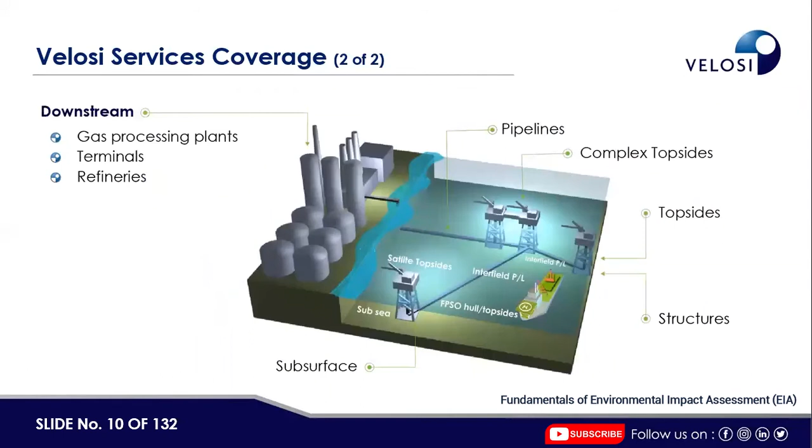So to go into a little more detail about the services we provide, in asset integrity management services, we conduct risk-based inspection, pipeline integrity management system, structural integrity management system, SIL, wellhead integrity management system, RCM, and RAM. We have conducted webinars on almost all of these service lines here in asset integrity management.

Then moving on to HSE and environmental services, we provide the complete scope of HSEI studies, risk assessment and management, HSE critical equipment and systems, environmental services, occupational health services, and emergency management and planning.

Then in engineering services, we carry out conceptual design feed, detailed design and engineering consulting services, operating manuals and procedures, design verification and appraisal, fitness for service, and as-built drafting services. We have conducted a webinar on fitness for service previously.

Then moving on to software solutions, we have our own in-house team of software development engineers.

Over the years, we have developed various software being used by clients all over the world. VAIL-Plant is our asset integrity management software, which I mentioned earlier. VAIL-PHA, process hazard analysis software, which is used for HAZOP and SIL studies. VAIL-PSRA, petrol station risk assessment software.

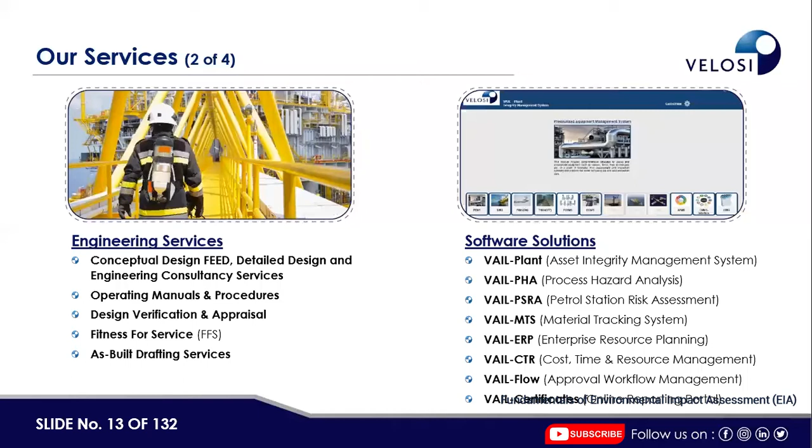Then we also do audits and assessments, such as OSHA safety audits, technical audits, environmental audits, structural audits, regulatory compliance audits, and so on. And we also do ISO certification and trainings for almost all the leading standards, such as 9001, 14001, 45001, and so on.

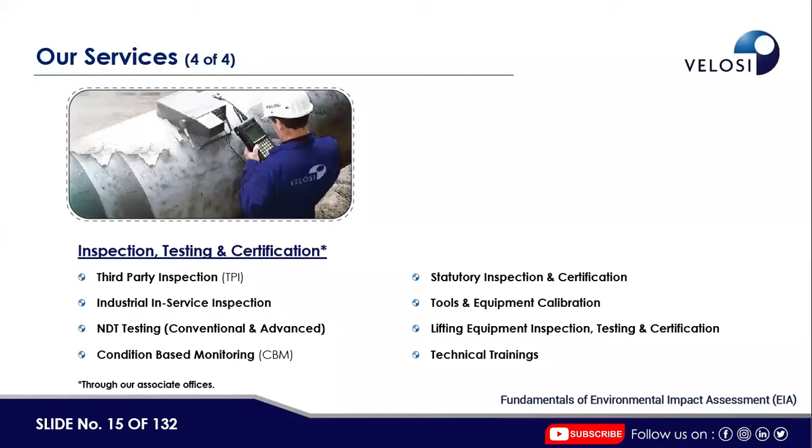Moving on to inspection, testing, and certification, we also provide third-party inspection services, industrial in-service inspection, NDT testing, both conventional and advanced, using our own in-house equipment, condition-based monitoring, statutory inspection and certification, tools and equipment calibration, lifting equipment inspection, testing and certification, along with technical trainings.

So to provide these inspection services, here are some of our in-house equipment. For MFL, we have the Floormap. For coating thickness measurements, we have the Elcometer Minitest. For corrosion under insulation, we have the Ediflex. For LRUT, we have the Teletest Focus Plus. For ultrasonic thickness measurements, we have the Olympus 38DL. For positive material identification, we have the Olympus XRF analyzer. For tank weld inspection, we have the Eddify V750 vacuum box.

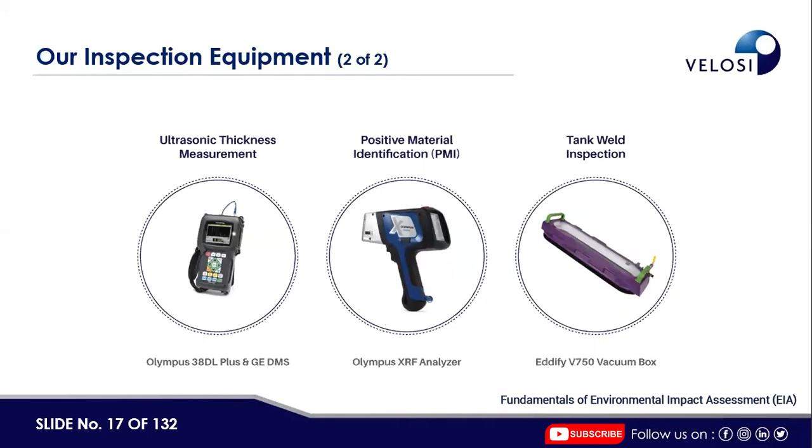Velosi has successfully executed over 600 plus projects with over 300 plus clients, including ADNOC, Dragon Oil, Saudi Aramco, Lukoil, and many, many more big names in the region.

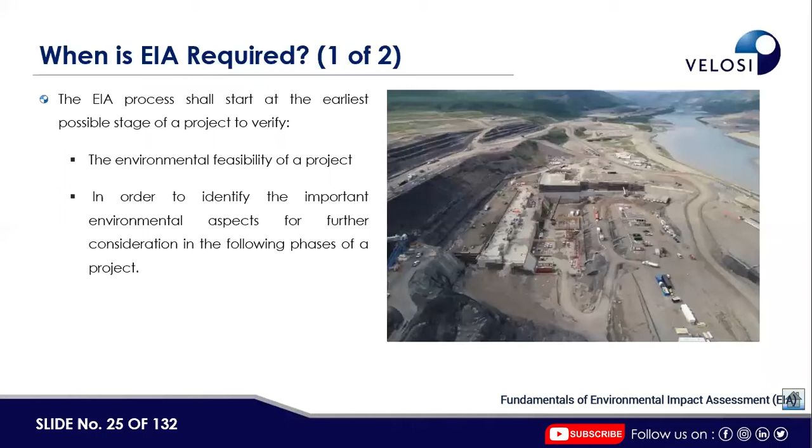But in some circumstances, we have to follow the legal authorities available in the region. The relevant authority may require only environmental impact assessment at the early stage of the project. Some authorities, depending upon the nature of the project and the facility, can also ask for environmental impact assessment during the operation phase as well.

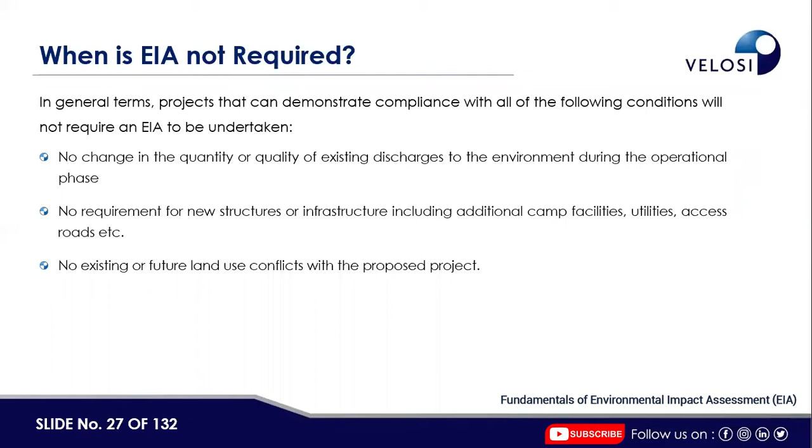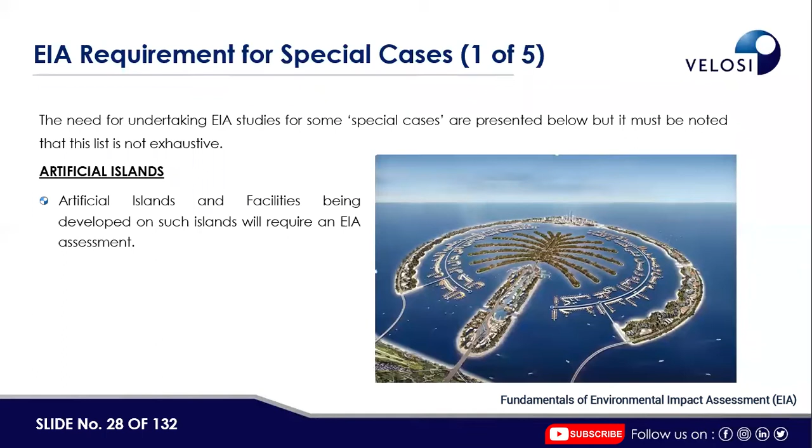But there are some cases, some circumstances, when the environmental impact assessment is also required. For example, an artificial island. If there is a need for development of an artificial island, we need to develop a detailed environmental impact assessment.

Then there is another case where environmental impact assessment is required, that is existing facilities. EIA will be reviewed as part of the HSE integrity assurance audit, including the environmental monitoring requirement for performance of emission control equipment and effluent standards.

Sometimes it is the requirement of the facility, or the client, to conduct a 5 year HSE integrity assurance audit, or as per the client requirement they can set the frequency. In that perspective, we also need to conduct the environmental impact assessment, for existing facilities, whether the controls are in place or not, or whether the discharges into the environment are in a controlled manner or not. At that point, we also need to conduct environmental impact assessment.

And then there is brownfield and modification projects. If an existing facility wants to expand operations or modify the project, then at that stage we also need to conduct the environmental impact assessment. If there is an already existing facility and they want any modification that has a significant environmental impact, then we need to conduct the environmental impact assessment in detail.

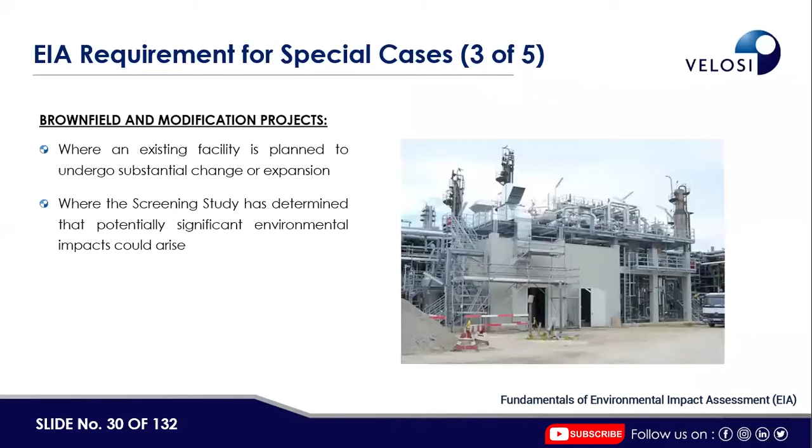There is also a combined EIA for some project facilities and activities. For example, in seismic surveys, we need to make a combined environmental impact assessment. In this kind of project, there is no FEED, no detail engineering, no construction, and no operation.

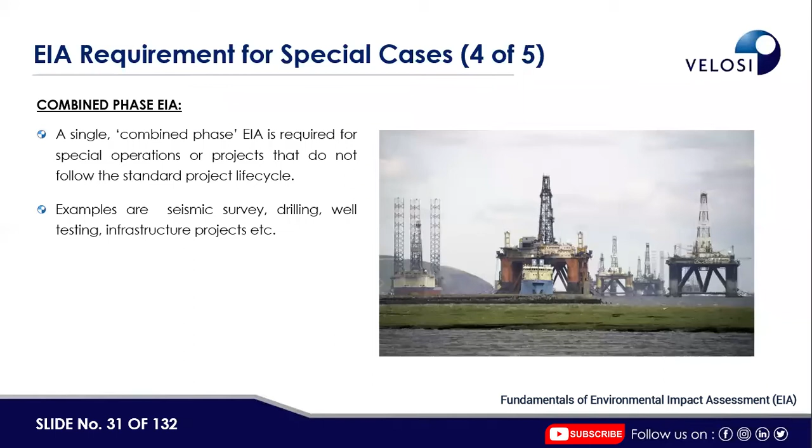In the same way, drilling and well testing are also the same kind of projects where there is no FEED, no detail engineering, no construction, and no operation as such separately. So that's why we need to conduct environmental impact assessment for these kinds of projects as well.

Then if a facility or project is going to undergo decommissioning or demolition, we have to assess the environmental impact as well - what is going to be discharged and what is going to be impacted. We have to conduct a detailed environmental impact assessment for decommissioning and demolition too.

So far we have discussed and explained what environmental impact assessment is, when we have to conduct it, and at what stage we don't need it.

Now we are going to describe the environmental impact assessment objectives - basically what the objectives are and why we need to carry out the environmental impact assessment.

First, the objective of the environmental impact assessment is to provide a detailed description of the environmental baseline condition. What is environmental baseline condition? We will explain in the upcoming slide.

Another objective of environmental impact assessment is to identify the impacts of the proposed project - what impacts will be created by the proposed project. We have to identify this, as environmental impact assessment is one of the procedures we explained in the first slide.

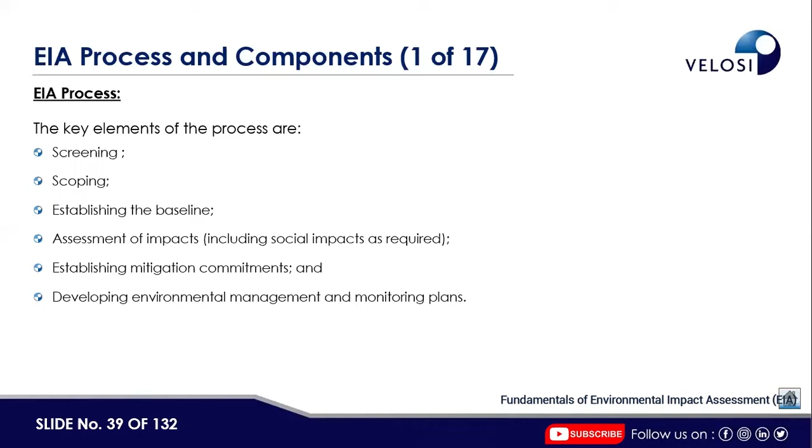In the environmental impact assessment, we do project definition or hazard identification, and we make the baseline data as well as the environmental profile. On the basis of all these things, we predict the environmental impacts that can be generated due to the project activity or project phase.

Then on the basis of identification of the environmental impact, we evaluate the impacts to determine whether they are significant or not. Based on the nature and significance of the environmental impact, we propose mitigation measures so that the impact is not significant, because if the environmental impact is significant, the project cannot move forward. Therefore we propose mitigation measures so that the residual impact can be less.

So this flow chart describes the process: starting from screening, then the scoping study, then the EIA. On the basis of the baseline profile, we predict environmental impacts, and based on those impacts we evaluate them. Then, based on identification and evaluation, we propose mitigation measures.

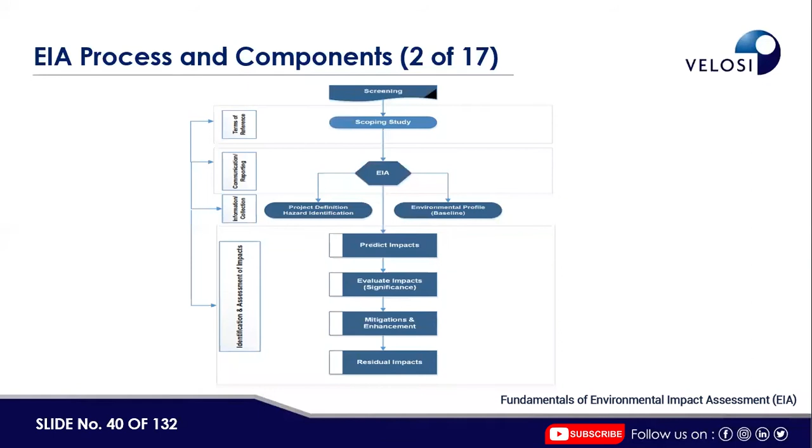Ms. Gayatri, my colleague, already explained what screening and scoping are, and now we are going to describe them further. What is screening and what is scoping? Now we are going to describe this in detail.

As my colleague mentioned, screening is a process of deciding whether or not a project is likely to have significant environmental impact, and therefore whether or not an EIA is required. So screening decides either we require an environmental impact assessment or not, or it decides whether the project has a significant environmental impact on the environment or not. Screening is the first step to decide either the project has a significant environmental impact or not, yes or no, and if it does, then we determine whether we need an environmental impact assessment or not.

A screening study involves conducting a preliminary review of the project, identifying the sensitivities of the site and surrounding land uses, considering the environmental release to air, water, and land, and making a judgment on whether or not any significant impacts are likely to arise. It's the same case as we described, we have to check whether the project activities or the project itself is releasing any air emissions or other discharges to the environment with significant impact, and then we have to conduct the environmental impact assessment in detail.

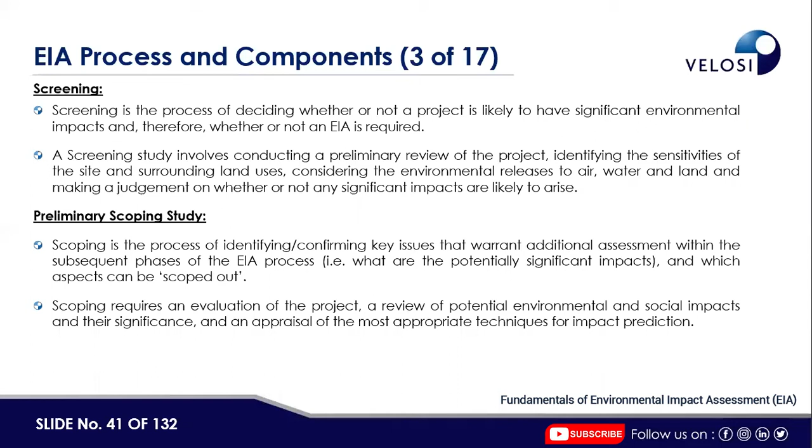If the project is in an industrial area, then there are some components that can be scoped out as well. So the preliminary scoping study basically defines the scope of the environmental impact assessment, and in some countries it is also called the terms of reference.

Then there is the final scoping report as well. There are different techniques available that can be used in different regions to finalize the scoping report.

The first is a checklist. There are different kinds of checklists in the regulation, on the client side, or even an experienced environmental scientist, engineer, or environmental person can make their own checklist of what to include in the scoping.

Then there are risk matrices as well, to evaluate the impacts. As mentioned before, if the project has an environmental impact and it is significant, then we have to conduct the environmental impact assessment or the particular baseline survey. So the risk matrix helps us identify which environmental impacts are significant and which are not. Then there's professional judgment and brainstorming.

If a person has enough experience, enough knowledge, and has conducted enough environmental impact assessments, they can also judge what environmental impacts are significant and what are not significant. There is also a brainstorming meeting, a workshop, or a team discussion where the team discusses which environmental impacts are significant, which are not, and which require a detailed survey. So professional judgment and brainstorming is also one of the tools to finalize the scoping report.

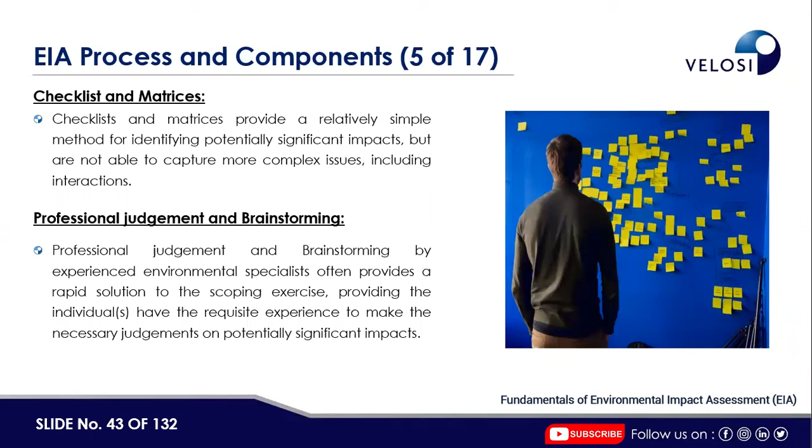And the next point is the ENVID workshop, or ENVID. ENVID is basically an exercise or workshop, a brainstorm meeting and discussion among professionals of different disciplines. It can involve environmental engineers, process engineers, design engineers, HSE engineers. It is a discussion, a workshop in which all discipline engineers sit together, review the project description, and identify which environmental impacts are potentially significant and which are not.

It is a workshop that must be chaired by an experienced environmental scientist or environmental consultant or professional. They should have enough knowledge about the process, what the process is, and what impact the process can have on the environment. There are different methodologies for conducting the workshop, and there are different guide words that can be used to identify impacts in the ENVID workshop.

For example, there is an environmental aspect group called air emissions, which includes different kinds such as stack emission, vent emission, and fugitive emissions. In the same way, there is an environmental aspect group for liquid discharges, one for waste disposal, and a guide word or aspect group for resource consumption.

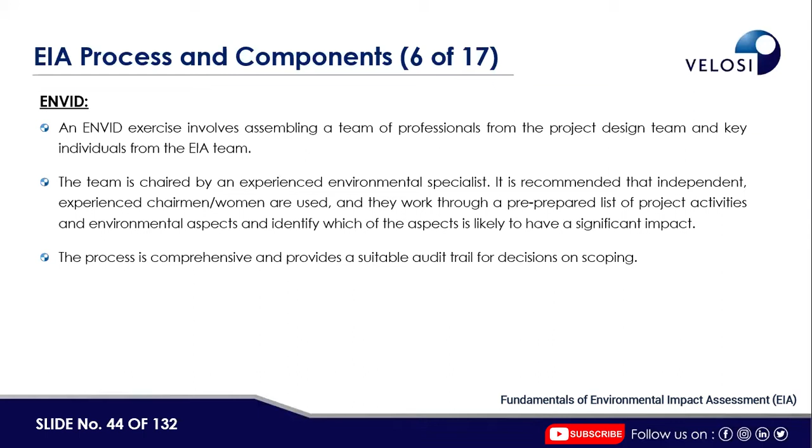With the help of these guide words, we can identify which environmental impacts are significant and which are not as significant.

You can see in the air emission, we identify different activities. For example, vehicular movement - there are two aspects which can be raised due to vehicular movement: one is the engine exhaust emissions, and the second one is dust emission.

In dust emission, there are different kinds of particles: for example particulate matter 10 (PM10), TSP (total suspended particulate), particulate matter 5, and particulate matter 2.5. So basically there are different particulate matters which can be generated due to vehicular movement, and there is emission from the vehicle engines as well.

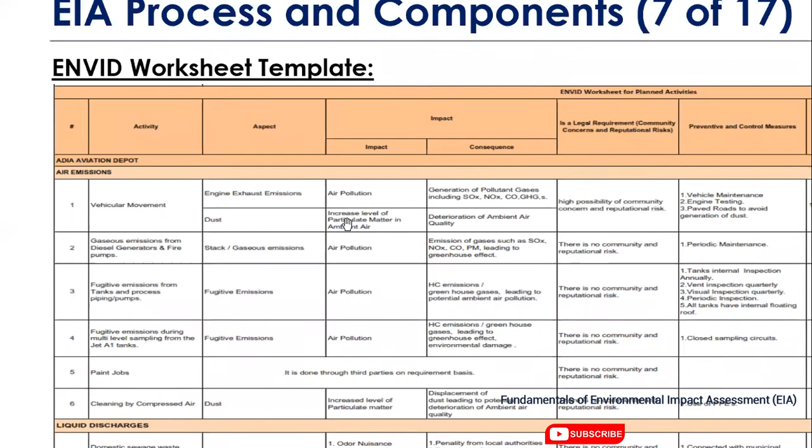The impact can be air pollution, an increased level of particulate matter in the ambient air.

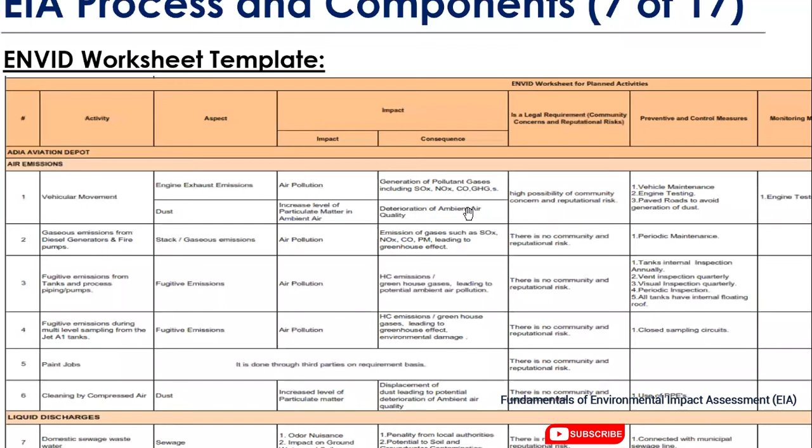The consequences can be generation of pollutant gases, including oxides of sulfur, oxides of nitrogen, carbon monoxide, and GHG, greenhouse gases. Then we have to identify either there is a community concern or a reputational risk.

If the project is very near to the community, then there might be a chance that this project is a community concern. The community can raise the concern, because if vehicular movement is more, then there is more pollution. So they can raise the question, they can raise it against the project, and it can become a community concern.

And if the values of emission from the vehicle exceed the limit, then it might be a reputational risk as well, because every company has its own reputation. They have their own policy that they must comply with environmental laws, and if the values exceed the prescribed standard limit, then there might be a reputational risk as well.

So we have to identify both perspectives - either there might be a community concern, or only a reputational risk, or there are chances that there might be both a community concern and a reputational risk as well.

Then we have to identify the preventive and control measures that are already in place. For example, for the same activity we discussed, vehicular movement, there is a control measure - vehicle maintenance. If the vehicle is maintained properly, there is very less chance that they emit more pollutants.

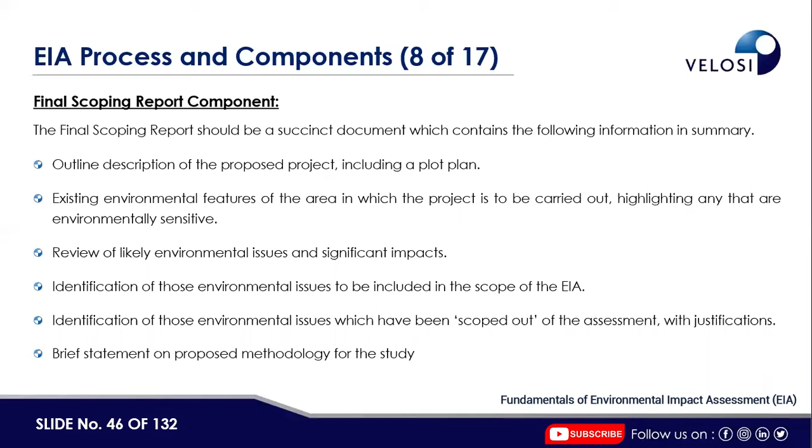Now there was a question before that we already addressed, regarding the environmental baseline. What is the environmental baseline? As explained before, there are different features and components that we need to monitor, and that condition and survey is called the environmental baseline.

For example, ambient air quality, soil sampling and analysis, noise monitoring, groundwater sampling and analysis, and depending on the nature of the project, marine survey, terrestrial survey, and socio-economic survey as well. So the EIA should include a detailed evaluation of the baseline condition of the project and its surroundings.

There are different criteria at which stage or level we have to conduct the environmental baseline survey. In some guidelines and regulations, we have to cover a 2 kilometer square area. In some guidelines, 5. It depends, but we have to cover at least a minimum of 2 to 5 kilometer square area for the environmental baseline conditions.

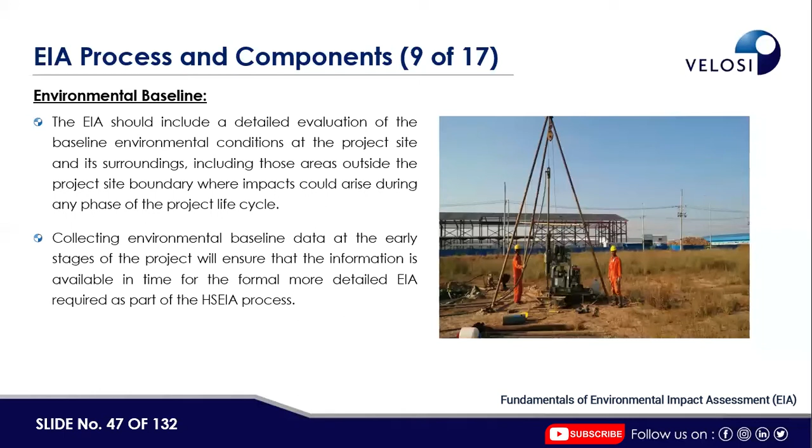Then the impact assessment and significance. As mentioned before, there are different criteria and methodologies we can use for impact assessment and to identify the significance of environmental impact. Four types of environmental risks need to be considered: one is impact associated with activities such as civil engineering; then routine impact associated with planned normal operations; then non-routine impacts such as those arising from process trips, emergency scenarios, accidents; and historical impact due to past activities.

Now we will explain and describe planned environmental impacts. Planned environmental impacts are those associated with normal, routine operations and normal project activities. For example, a building project is a normal routine planned environmental impact. An operating facility, for example emissions to atmosphere through combustion or venting, is a normal routine operation. If the project facility has a generator on site to provide electricity, operating it will definitely emit emissions to the air. It is a normal and planned environmental impact because it is a planned activity.

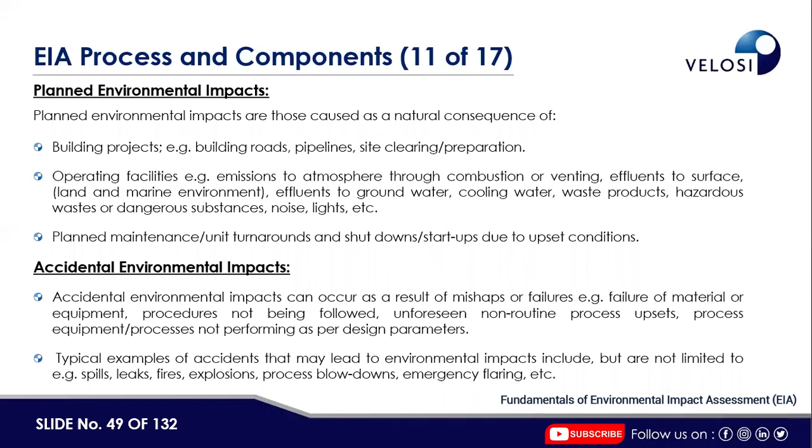Then what is the significant environmental impact? The significance of the planned and accidental environmental impact depends on a number of factors: impact magnitude, severity, impact duration, reversibility, impact interaction, whether the impact is positive or negative, and the sensitivity of the receiving environment.

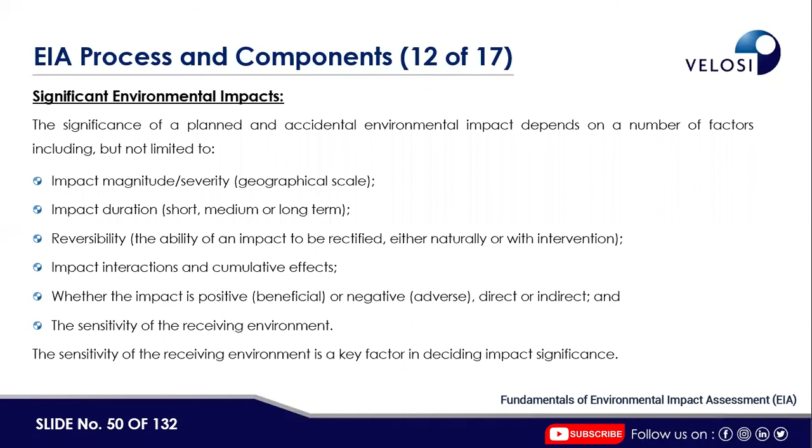As mentioned, in the template I showed you during the ENVID, we have to identify the significance of the environmental impact. There are different rankings which can be used for ranking the significance of the environmental impact assessment. I will show you one of the matrices.

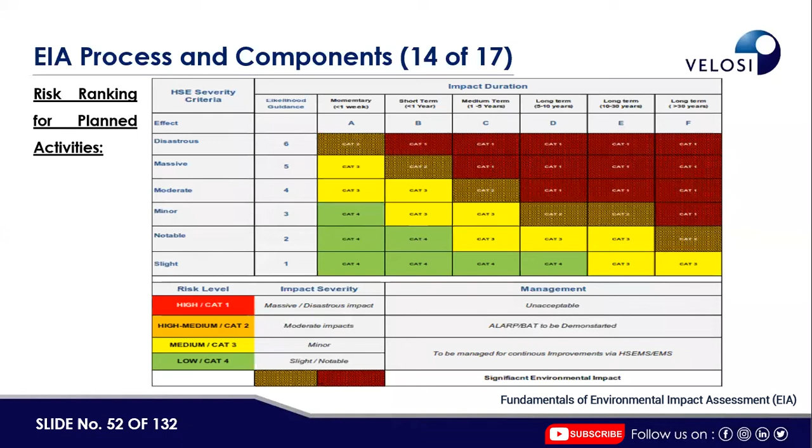Now I'm going to explain what is the major accidental environmental impact. Accidental environmental impacts are those caused by accidental releases that have the potential to lead to disastrous, catastrophic, major, or serious consequences. Previously we only defined accidental environmental impact, but here we are defining what is a major accidental environmental impact, which basically leads to disastrous, catastrophic, major, or serious consequences to the environment.

With respect to the accidental environmental impact, we have to use another matrix, called the environmental risk potential matrix. This is a separate matrix which we normally use for accidental impacts.

Here we have to define or differentiate between the planned and the unplanned. Planned impacts are those which arise due to normal or routine operations, and unplanned are those which arise due to unforeseen circumstances - accidental, like spillages, loss of containment, leakages. All are part of the accidental environmental impact assessment.

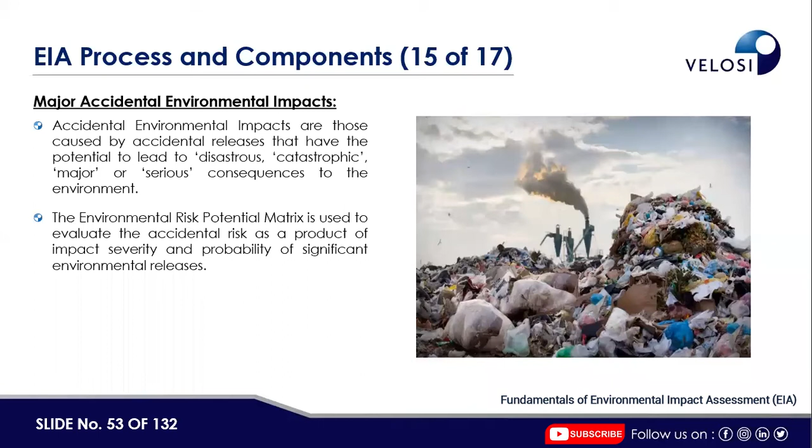In the previous slide I explained the matrix used for the planned environmental impact assessment, and for the accidental environmental impact we have to use the risk matrix, which I'm going to share now. This is the matrix that we normally use for the unplanned environmental impact.

Now I'm going to explain basically the components or the normal report structure of the environmental impact assessment.

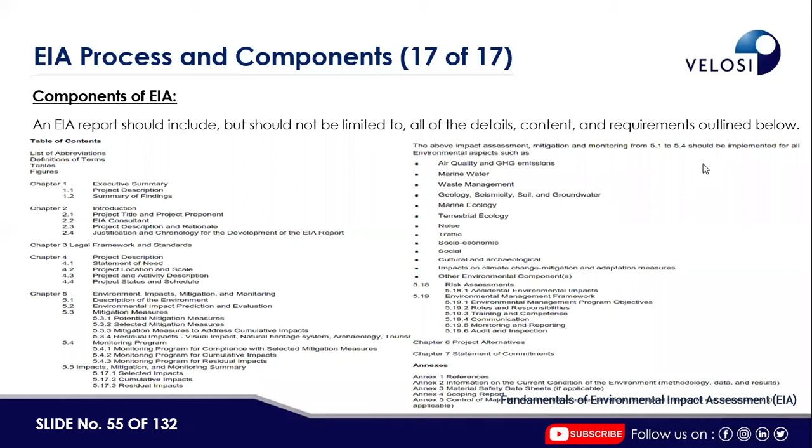This is the normal environmental impact structure, starting from chapter 1, which is an executive summary. In the executive summary we have to briefly explain the project description, then give a summary of the findings. The next chapter, the introduction, is again a brief summary of the project.

Then we have to mention the project title and the project proponent, who is proposing the project, and mention the details. Then, who is conducting the environmental impact assessment - we have to put the environmental impact assessment consultant details.

Then the project description, the rationale, the justification, and the chronology for the development of the environmental impact assessment. Then the next section is the legal framework - what are the legal requirements, the legal standards that apply to that particular project?

There are some standards and legal frameworks which are not applicable to that particular project, then we don't need to mention them. But all the standards and frameworks that apply to that particular project, we need to mention in section 3.

Then chapter 4, section 4, again will be the detailed description of the project: statement of the need, project location, project activities, status, schedule, everything. Then section 5, that is the detailed section - environment, impact, mitigation, and monitoring measures.

In this section we have to identify and conduct the baseline survey which falls under the environmental section. Then we have to identify and evaluate the impacts, mitigate the environmental impacts, and propose some monitoring measures as well.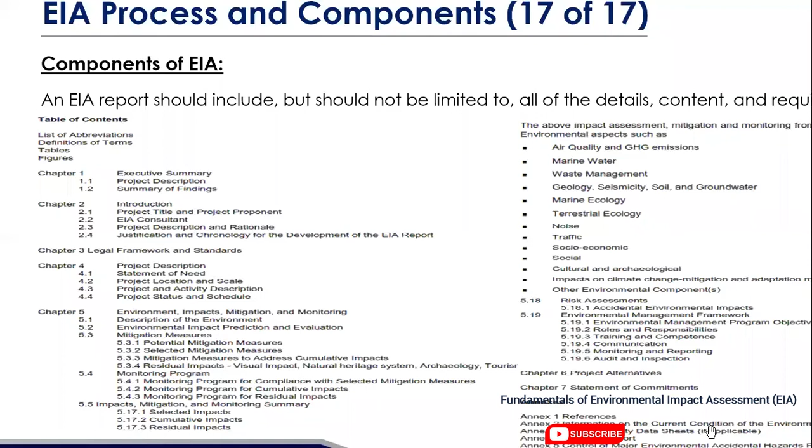And then we have to assess the risk assessment as well. We have to carry out the risk assessment, which I mentioned before, for all those unplanned environmental impacts which arise due to unplanned activities - we have to carry out the risk assessment as well.

Then we have to propose a management framework, which includes the environmental management program, objectives, roles. We have to define some roles and responsibilities.

We have to propose some training and competency requirements. We have to mention some communication protocols, monitoring and reporting tools and requirements, and then audit and inspection tools and requirements.

And the last section is the project alternatives. We have to have some discussion on the project alternatives as well - for example, if we change the locations, if we change the technology of the project activity, we have to identify the project alternatives as well.

And then the last section is the statement of commitment, where the project proponent has to give some commitment that they will comply with all the applicable standards and all the monitoring requirements mentioned in the environmental impact assessment.

This is the project alternative. I explained already that we have to mention some alternatives on the basis of, for example, the project location.

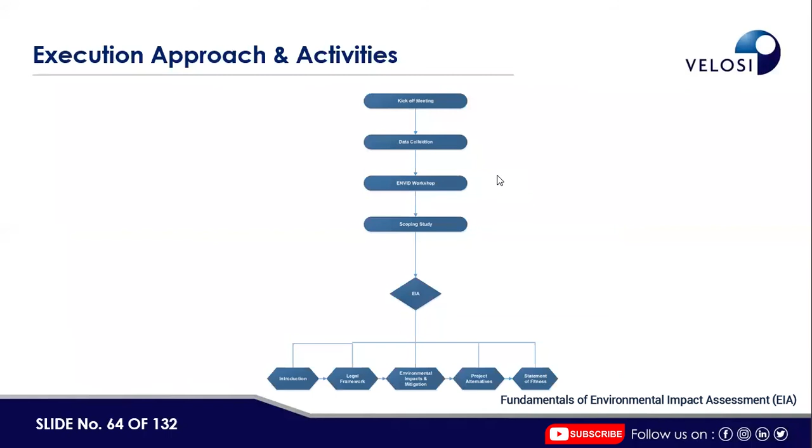What we did and carried out during the execution of this project, I will show you in the flow chart. First, we carried out the kickoff meeting, then data collection and data review. What kind of data did we collect for this EIA? We collected the process description, P&IDs, PFDs, and all the relevant company HSE documents, and reviewed all of them.

On the basis of the data collection, we conducted the ENVID workshop. We explained before what the ENVID workshop is, but I will explain it again for continuity. ENVID stands for Environmental Impact Identification workshop, and it is normally chaired by an experienced environmental scientist, environmental consultant, or environmental engineer with enough knowledge, and it must be participated in by engineers from different disciplines - process engineers, HSE engineers, design engineers, construction engineers, resident engineers - all disciplines applicable to that particular project must participate in the ENVID workshop.

As my colleague already explained, it is a qualitative assessment of the risk associated with the environment due to the project activities. On the basis of the ENVID workshop, it becomes easy to identify the most potential significant environmental impacts that we need to focus on in the environmental impact assessment.

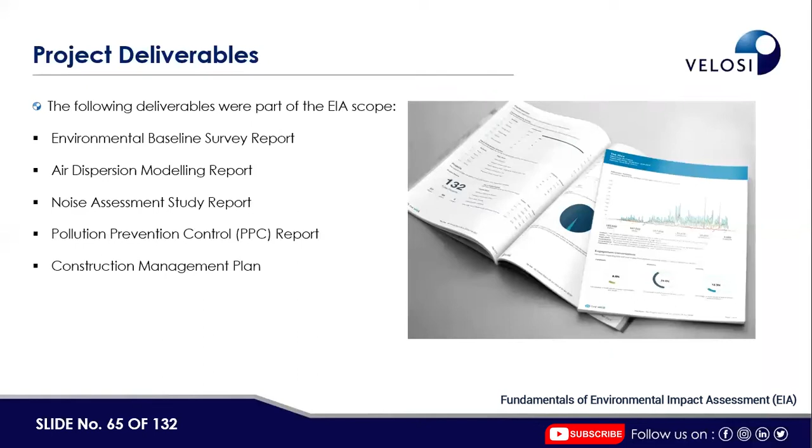Now I will explain one by one the detail of air quality: what were the environmental impacts, what were the baseline conditions, and how we evaluate the environmental impacts and propose mitigation measures.

Environmental air pollution can cause significant effects on the environment and primarily affects the respiratory system. These are some conditions and causes due to air pollution. It can damage the environment and raise health issues, because there are different criteria pollutants, for example carbon dioxide, carbon monoxide, oxides of nitrogen, oxides of sulfur, and particulate matter. These criteria pollutants not only impact the environment but can also affect health.

There was a question with respect to climate for the baseline survey. Yes, under air quality we have to consider climate as well: what is the wind direction, what is the wind speed, what is the temperature, what is the frequency of rain, and in which months we can expect more rain. What is the winter season, what is the summer season—we have to consider all of this under climate for air quality.

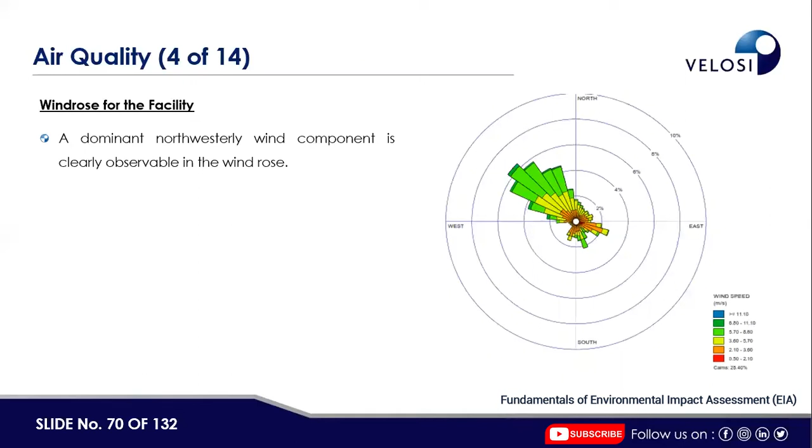This is the wind rose that we collected. A dominant northwesterly wind component is clearly observable in the wind rose. We can see the direction of the wind is northwesterly, and this is the data we used and collected for the facility.

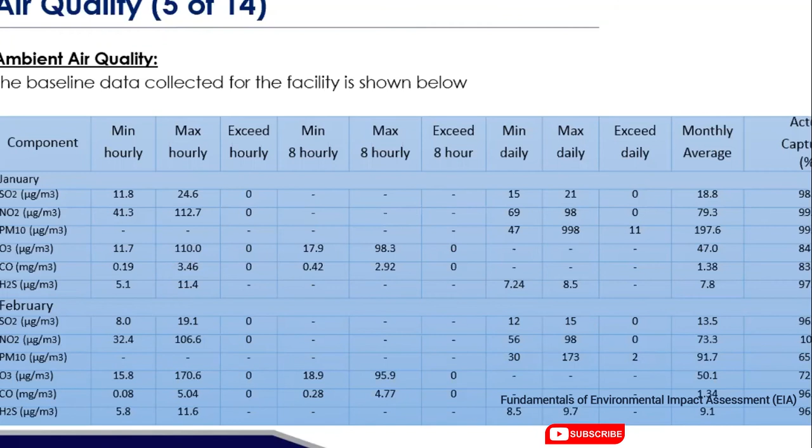You can see there is minimum hourly, maximum hourly, exceed minimum 8-hourly, maximum 8-hourly, exceed 8-hourly, minimum daily, maximum daily, exceed daily, monthly, and the actual capture, presented on a monthly basis. In January and February, what we monitored includes oxides of sulfur, oxides of nitrogen, NO2, particulate matter 10, ozone, carbon monoxide, and H2S.

These are the pollutants that we collected during the collection of the baseline for the ambient air quality. You can see there is a minimum hourly, then maximum hourly, then exceedance hourly, minimum 8 hours, maximum 8 hours.

These are the different frequencies, minimum hourly, but in the standard perspective, the prescribed limit varies from region to region. In some regions, the criteria pollutant must be monitored for 8 hours, some pollutants for 24 hours, some for 1 year as well. So it varies from region to region and country to country.

But in this study, we considered minimum hourly, maximum hourly, exceedance hourly, minimum 8 hourly, maximum 8 hourly, exceedance 8 hourly, minimum daily, maximum daily, and exceedance daily as well, but for the month of January and February.

Then we carried out air dispersion modeling for the estimation of the maximum ground level concentration of the pollutants discharged from the stacks. In this project there are different stacks, and to assess the maximum ground level concentration, we carried out the air dispersion modeling.

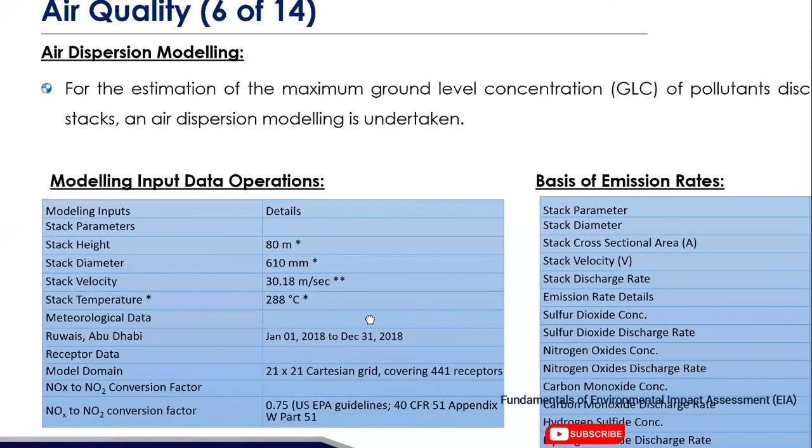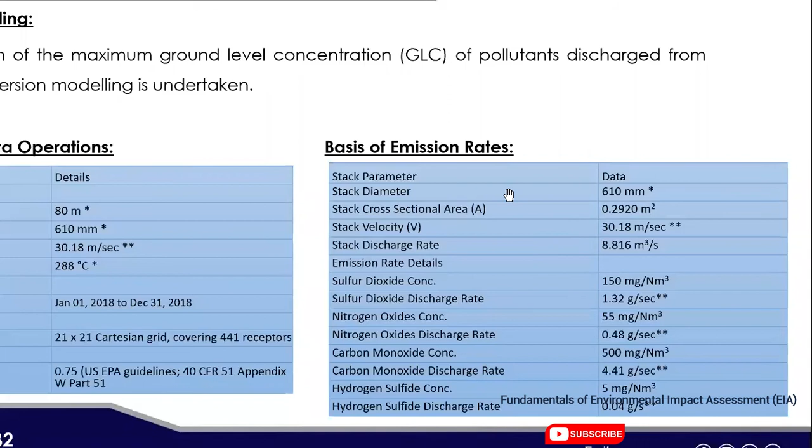For example, emission rate for sulfur dioxide, emission rate for oxides of nitrogen, emission rate for carbon monoxide, and emission rate for hydrogen sulfide as well. These are the different inputs that we used in air dispersion modeling.

We used the software Breeze AERMOD, which is US EPA's approved software, for the air dispersion modeling. The emission source incinerator was modeled with design data for comparison with the air quality standards.

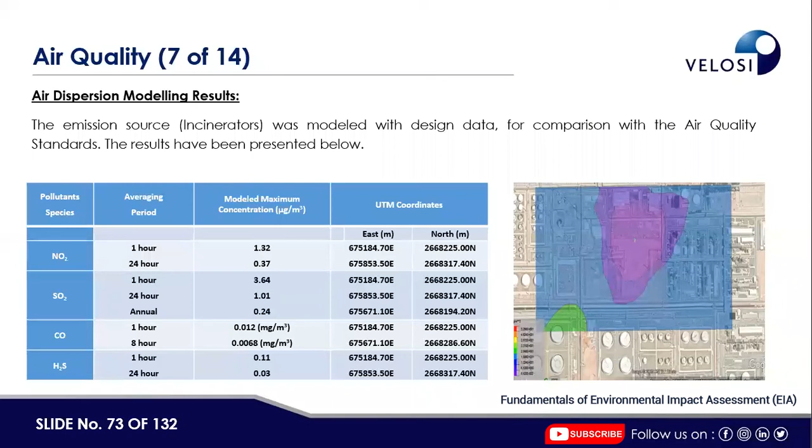These are basically the contours that we got after the air dispersion modeling. You can see the source of the emission of the pollutant, and accordingly, on the basis of the air climate, wind direction, wind speed, and stack height, these are the dispersion of the air pollutants.

Then we carried out the impact assessment. As explained before, after mentioning the current baseline conditions, we have to evaluate the impact assessment and carry out the environmental impact assessment. So we carried out the cumulative impact assessment, and the cumulative results give an indication of whether or not the long-term ambient air quality standards are likely to be exceeded.

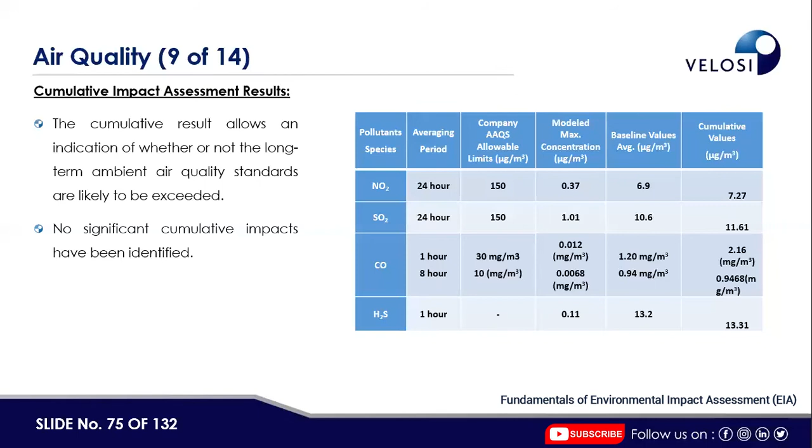No significant cumulative impact has been identified. So on the basis of the results of the ambient air quality and the air dispersion modeling, we concluded that there were no significant cumulative impacts identified.

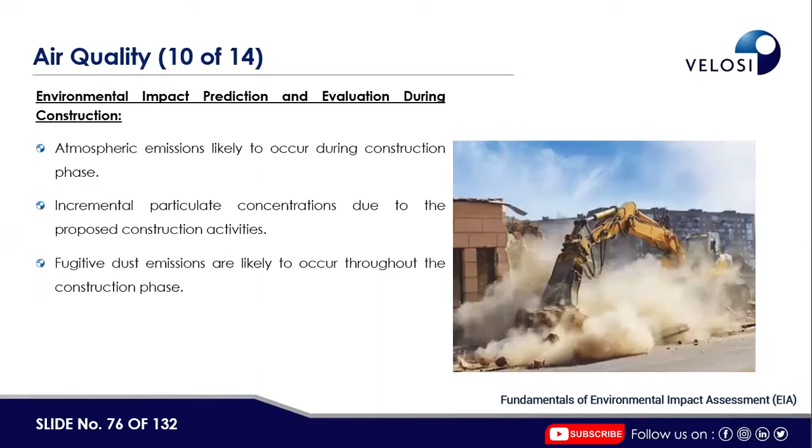Then environmental impact prediction and evaluation during construction: atmospheric emissions are likely to occur during the construction phase. Basically, in the construction phase there is vehicular movement and use of heavy equipment and machinery, so there are chances of dust emission and fugitive dust emissions during the construction phase.

Then during the operation phase, it is likely that atmospheric emissions and air quality impacts may occur during the operation phase of the proposed project. A few gases will be emitted from the heaters and boilers. There are basically three fugitive emission chances.

One is the emission from the boilers, heaters, and flares, and fugitive emissions will also be emitted from the flanges, valves, pumps, and compressors. There is also a chance that during operation of the facility, there is a possibility of H2S, SO2, NO2, and carbon monoxide from the incinerator stack.

Then if we see the cumulative impact, particulate matter and vehicular emissions may increase if any industry is established in the vicinity of the project. Therefore, the cumulative impacts are expected to be less.

On the basis of the impact assessment, we propose some potential mitigation measures. For example, unleaded petrol must be used to avoid emissions from the vehicle. If the fuel of the vehicle is of good quality, then there are very less chances of emission. We have also proposed some mitigation measures with respect to the equipment.

Vehicle emissions shall be kept to a minimum by eliminating engine idling time, then conducting regular maintenance. If the equipment and vehicle are maintained regularly and properly, there is a very less chance of emission. We propose the provision of VOC filters at the exhaust and proper PPE for VOCs will be provided to the workers. We also propose that the LDAR program should be implemented and launched, and that the handling of process chemicals should follow standard practices.

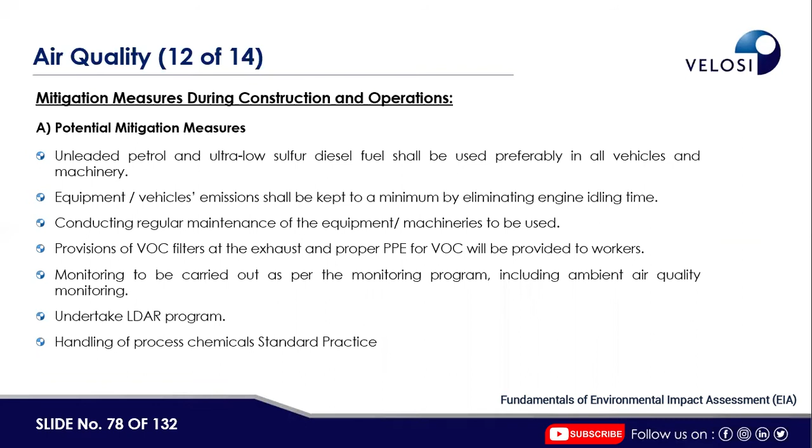There are some selected mitigation measures as well. The stack height should be higher than the roof height of the nearby structure to avoid dispersion issues of the pollutant gases. There are particular standards for this in every country, but if we follow the US EPA method, which is the most reliable, it is mandatory that the stack height be higher than the roof height of the nearby structure, so that the air pollutant can be dispersed properly.

We also propose a selected mitigation measure to ensure effective maintenance and operational procedures so as to reduce the potential for unnecessary plant operation interruptions or upsets. Emissions control can only be effective if maintained and serviced regularly. As mentioned before, if the equipment is maintained properly and the maintenance is done effectively, there is a very less chance of emissions.

Regarding speed limits, as mentioned before, if the road is unpaved and we do not monitor the speed limit, there is a high chance of road accidents and generation of particulate matter. That's why we propose a speed limit suitable for the type of road, which will help prevent accidents and subsequent traffic delays.

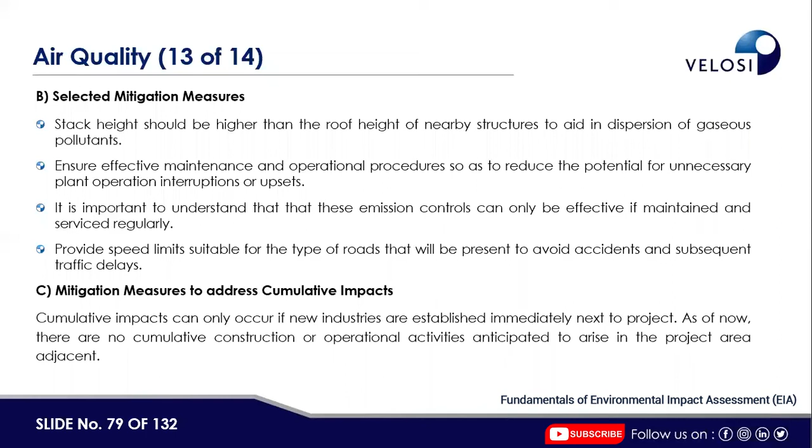We also propose some mitigation measures to address cumulative impact. Cumulative impact can only occur if there are new industries in the particular project area. In this project, there were no other industries, so we did not consider cumulative impact.

We also propose some monitoring programs. For example, a predictive emission monitoring system (PEMS) should be installed for flue gas monitoring, and a continuous emission monitoring system (CEMS) must be in place. Data tests for the CEMS and PEMS must be carried out. Routine checks of the flanges must be carried out to avoid fugitive emissions. Then an H2S detection system and periodic air quality monitoring should be implemented.

With respect to marine ecology, this project was very far from the marine ecology. That's why, on the basis of the ENVID workshop and document review, we finalized and anticipated that there is no impact on marine ecology due to this project's activities.

We've been receiving a few questions with regards to the air quality section. Somebody was asking about the main purpose of this air dispersion modeling, what software we use, why we carry it out, and what the inputs are to get the ground level concentration.

There are different kinds of software, but the software must be US EPA approved. We need to carry out air dispersion modeling to get the cumulative impact assessment, to check the dispersion of the pollutants around the surrounding environment. So the basic purpose is to check the dispersion of the pollutants, and the software must be US EPA approved.

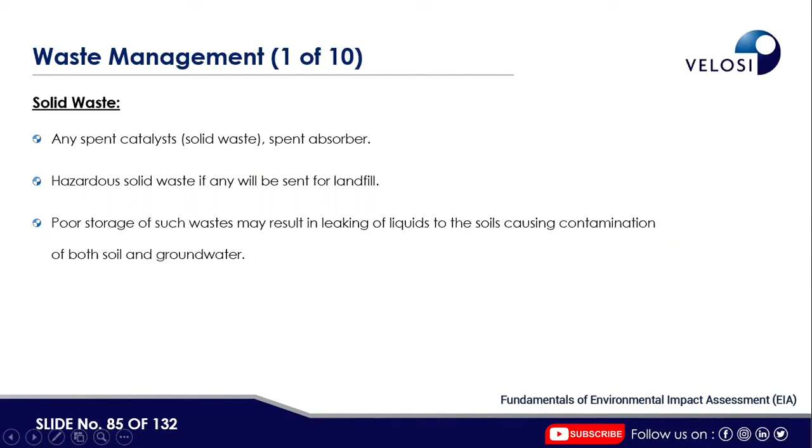Okay, try now. Hello Gayatri, can you hear us? Yes, it's clear, okay, continue. Let's continue please.

With respect to the solid and effluent summary, we collected the pollution sources: spent catalyst, for example catalyst for the Claus unit, catalyst for degassing, catalyst for tail gas hydrogenation, and then the discharge quantity, the component, destination, method of disposal by vendor, and their quantity.

For example, the catalyst for degassing has an intermittent emission mode, with a discharge quantity of 3 tons. The component is activated alumina, and the disposal method is by vendor, with a minimum 4-year service life, proper disposal, and recovery by the vendor.

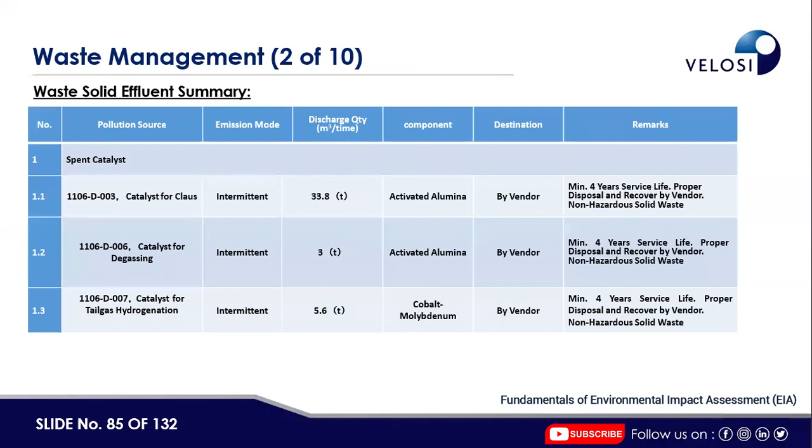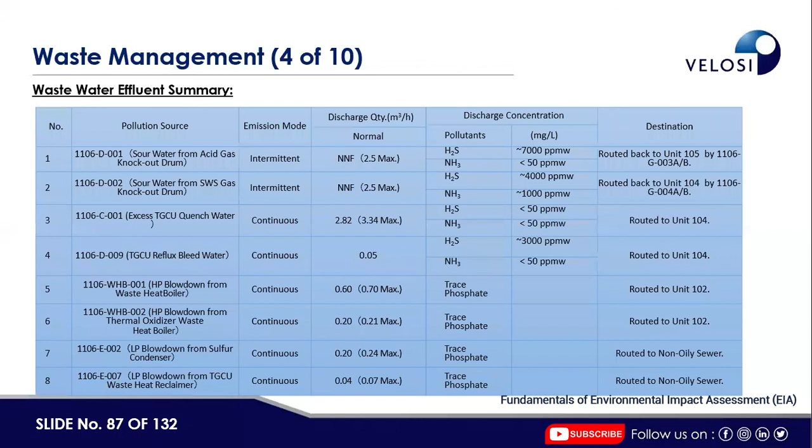Then, environmental impact prediction and evaluation during construction and operation: the liquid effluent likely to be generated includes sewage, hazardous liquid, and hydrotest water. There is sanitary sewage, and hazardous effluents which include paint and thinner from construction activities, as well as spillages.

Then the use of groundwater - water is required for construction and operation, and it can impact the groundwater level. If groundwater extraction is high, it can impact the groundwater reservoir if recharge is not done properly.

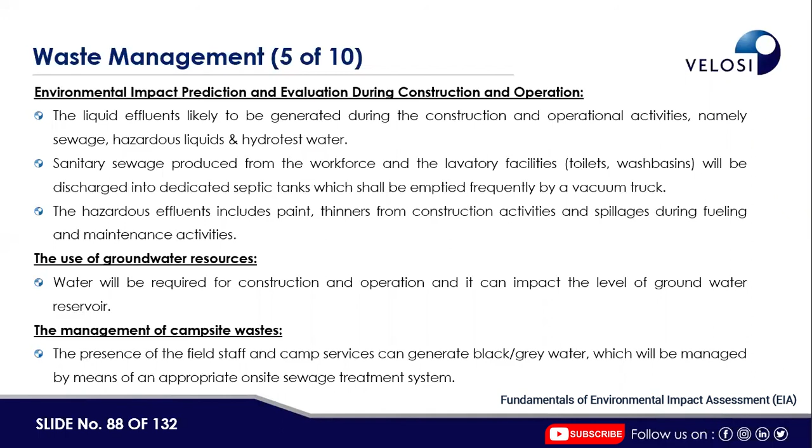Then the management of campsite waste - there must be a third-party vendor to collect the wastewater and manage the waste. And then spill and leakages, as explained before, these are accidental occurrences involving activities that use hazardous materials or the movement of a significant number of vehicles.

And then fire or explosion, if any happens, the quality of the soil may change because of the removal of nutrients on the upper layer of the soil.

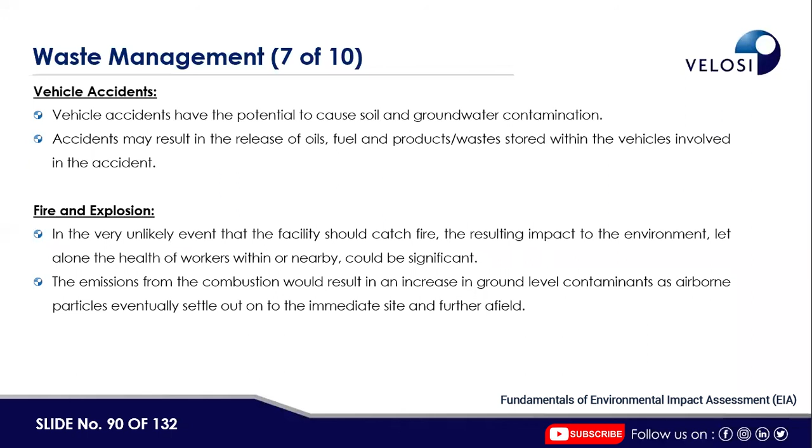A vehicle accident we already explained. Then fire and explosion, we also explained that if there is any fire and explosion, it may alter the quality of the soil because of the removal of the topsoil nutrients. Then we discussed the cumulative impacts.

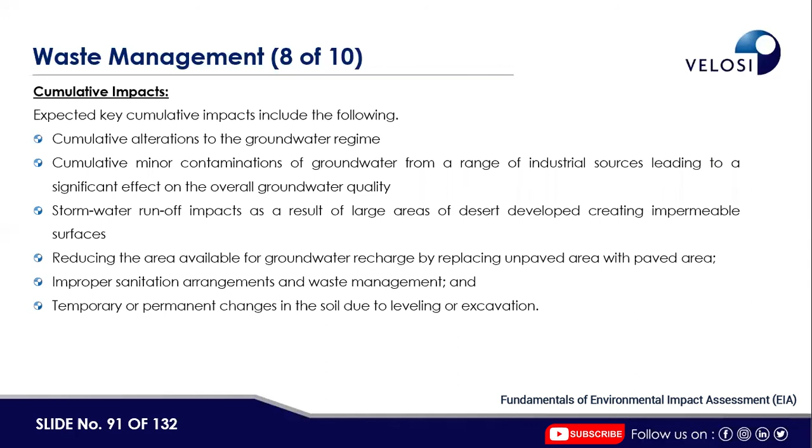Expected key cumulative impacts include the following: cumulative alteration to the groundwater, cumulative minor contaminations, stormwater runoff, reducing the area available for groundwater recharge by replacing unpaved area with paved area, improper sanitation arrangements, and temporary or permanent changes in the soil due to leveling or excavation.

Then we propose some mitigation measures: all hard standing and bunds will be inspected, suitable training will be performed, ensuring all equipment is in good mechanical condition, because if the equipment is not in proper mechanical condition, then there are chances of spills and leakages.

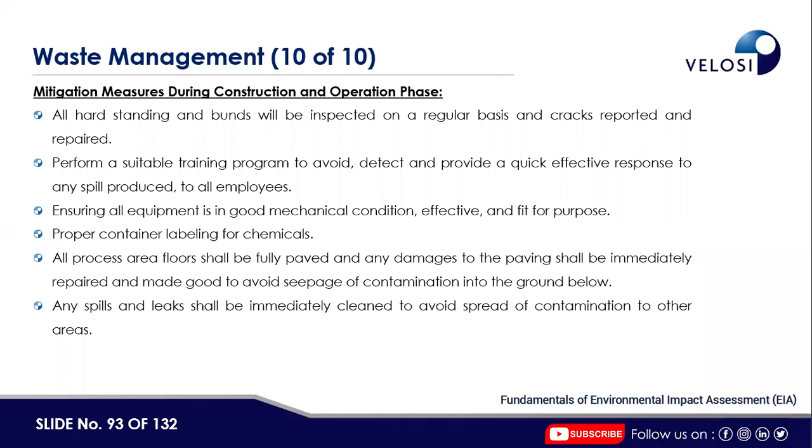Proper container labeling for chemicals can also avoid accidents. All process area floors shall be fully paved, because if not paved and there are any spillages or leakages, they can seep into the soil and degrade the soil, geology, and groundwater. Any spill or leak shall be immediately cleaned to avoid spread of contamination to other areas.

Then now we are going to start the geology section. Basically, the project that falls under this area has a very unique geology. The principal agent of transport for these deposits is the wind, because this is one of the desert areas.

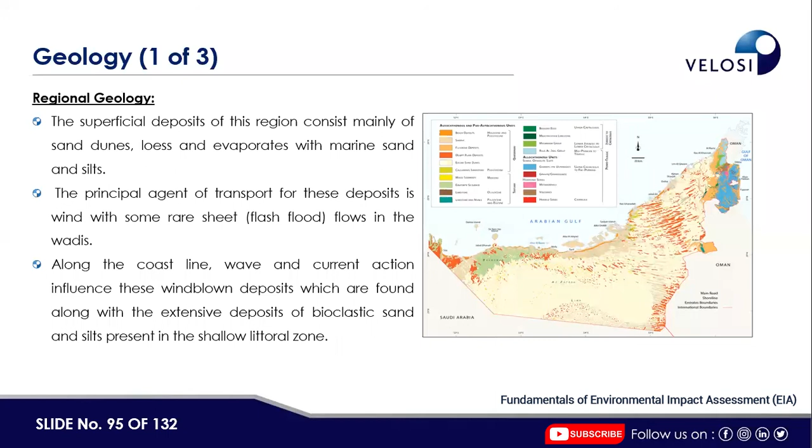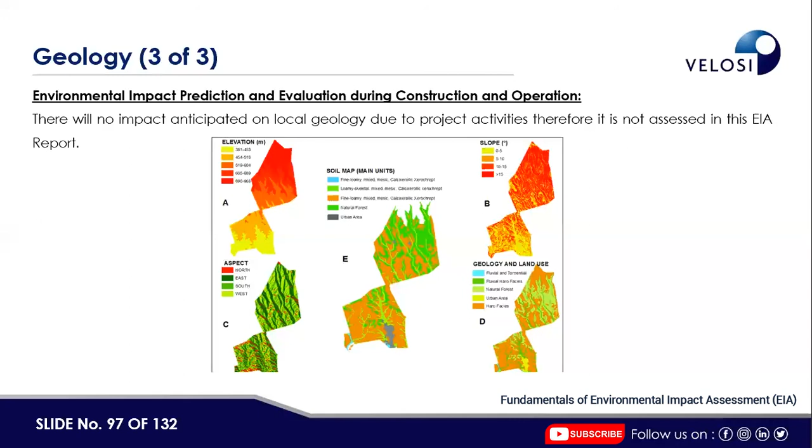Then to the west of the refinery is a small beach deposit as well. So these are the local geology around the project facility. There will be no impact anticipated on the local geology, because this project is basically the expansion of the existing project, expansion within the facility, and therefore we anticipate no impact on the local geology due to the project activities.

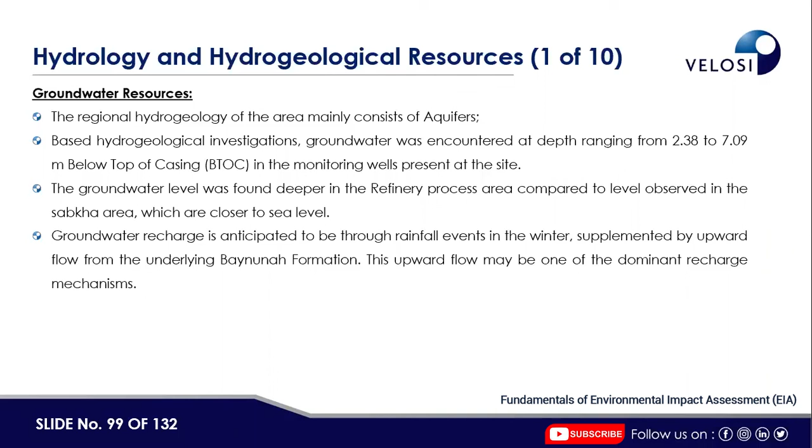Normally there are some US EPA guidelines as well, and there is a Dutch standard as well. But every country has its own standard with respect to the soil and the groundwater.

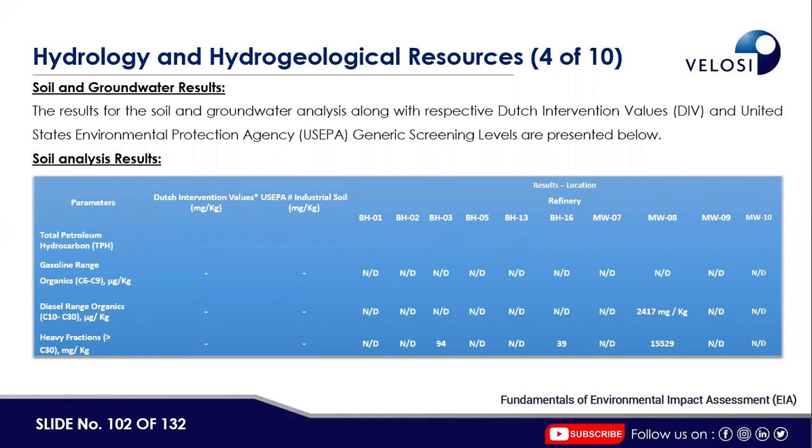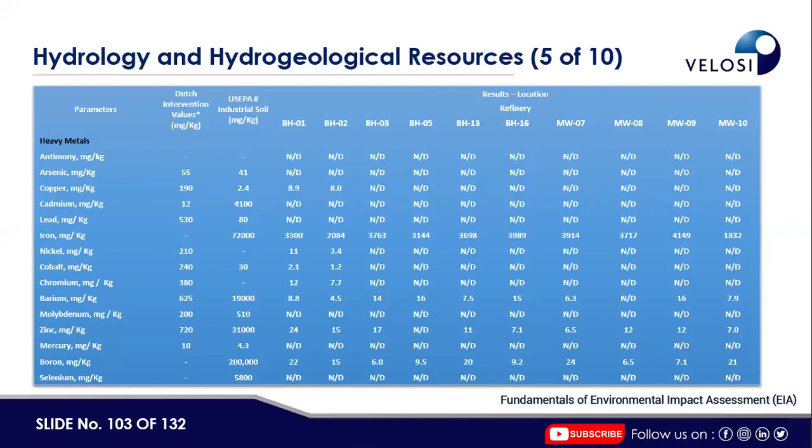So we have collected the soil sample, and the parameters include total petroleum hydrocarbon, gasoline range organics, diesel range organics, heavy fraction. Then we have sample and analysis for the heavy metals as well, which include antimony, arsenic, copper, cadmium, lead, iron, nickel, cobalt, chromium, barium, and other heavy metals as well. Then we analyze the BTEX as well, which include benzene, toluene, ethyl benzene, and other parameters as well.

All the parameters were compared with two kinds of guidelines: one is the Dutch intervention, and the second one is the US EPA.

Then we collected some groundwater samples as well, and the samples were analyzed and the parameters were compared with the Dutch intervention values. The parameters were pH, electrical conductivity, temperature, total suspended solids, TDS, BOD, COD, oil and grease, and some heavy metals as well.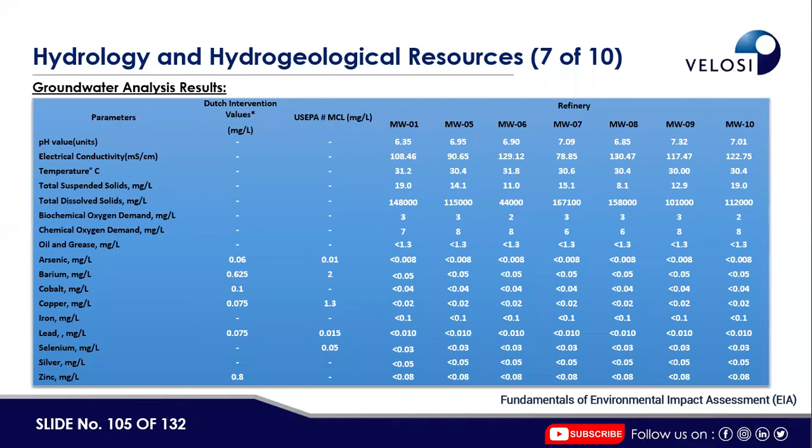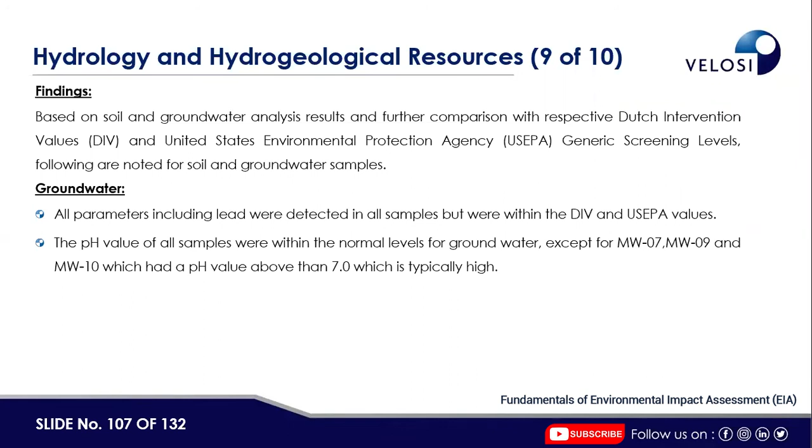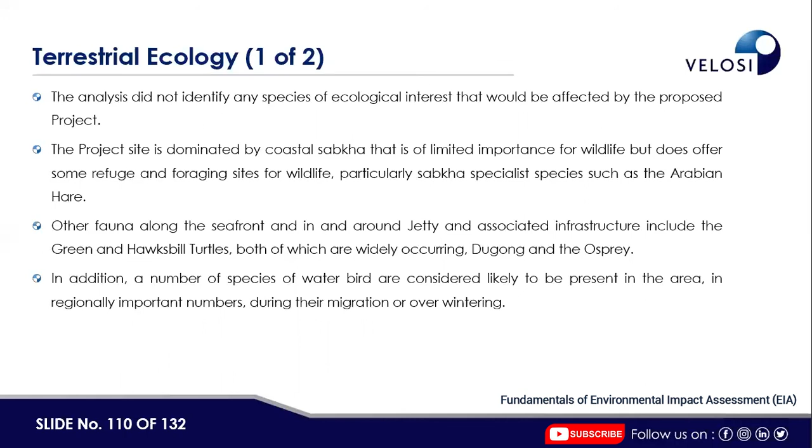With respect to the terrestrial ecology, as mentioned before, this project falls within an existing facility, so we did not carry out a detailed terrestrial survey. However, a desktop study was carried out, and the data was collected. But on the basis of the ENVID and the review of the documents, there is no impact anticipated on the terrestrial ecology, because this project falls under the existing facility.

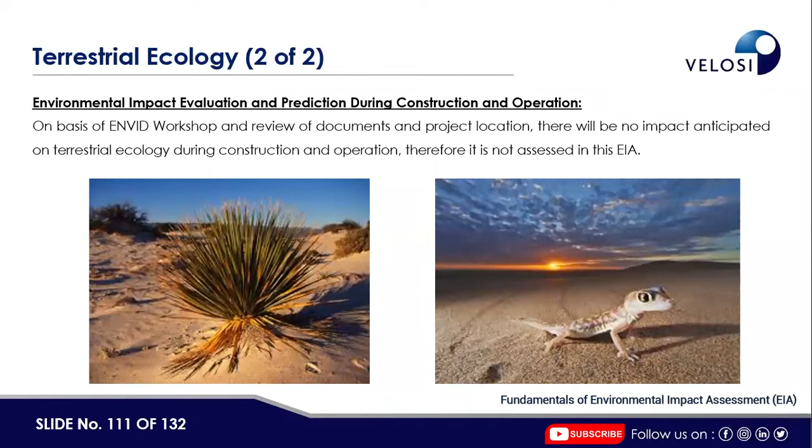Then we are going to start the noise section. We collected the baseline data for the noise and carried out the noise survey. We used equipment such as Bruel and Kjaer, model numbers 2250 and 4231. We carried out noise measurements for the day and the night.

In every country there is a separate standard. For example, in some countries there is a single continuous standard limit for 24 hours, but here we have separate limits for the day and the night. So we carried out measurements for both the day and the night.

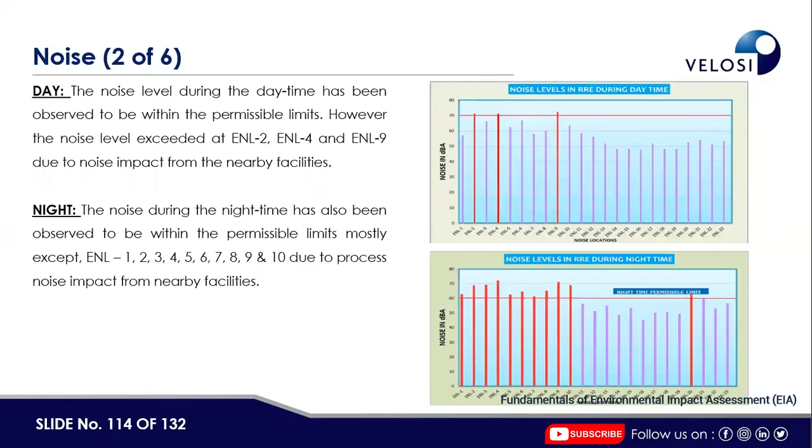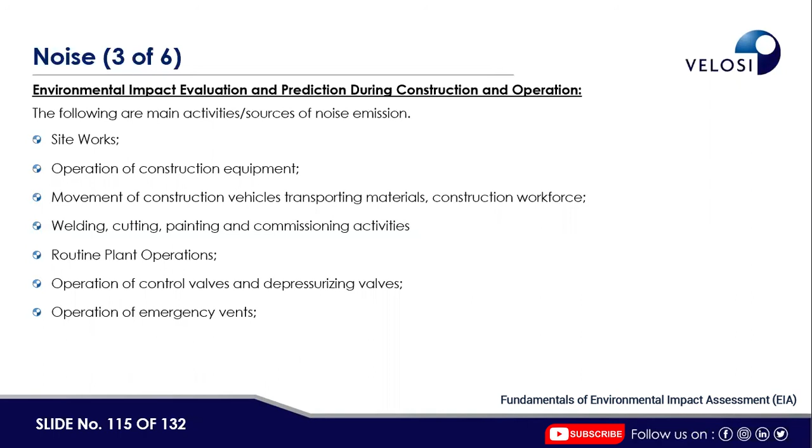Then we evaluate the impact during construction and operation. The activities that can generate noise are site work, operation of construction equipment, movement, welding and cutting, routine operations, operation of control valves and depressurizing valves, and operation of emergency vents.

Then we mention the cumulative impact. There are no future developments planned within the surrounding project. The cumulative impact associated with future development will have the following aspects: noise and vibration as a result of construction, and increased noise levels due to vehicle traffic movement.

Then mitigation measures for the cumulative impact: we did not propose any additional mitigation measures for the cumulative impact.

But for the construction and operation phase, we propose some mitigation measures. All vehicles, plants, and machinery should be fitted with effective exhaust silencers. We propose a silencer system for the plant and machinery. The diesel generator should be provided with a noise enclosure. Any machinery used intermittently should be shut off during periods of non-use.

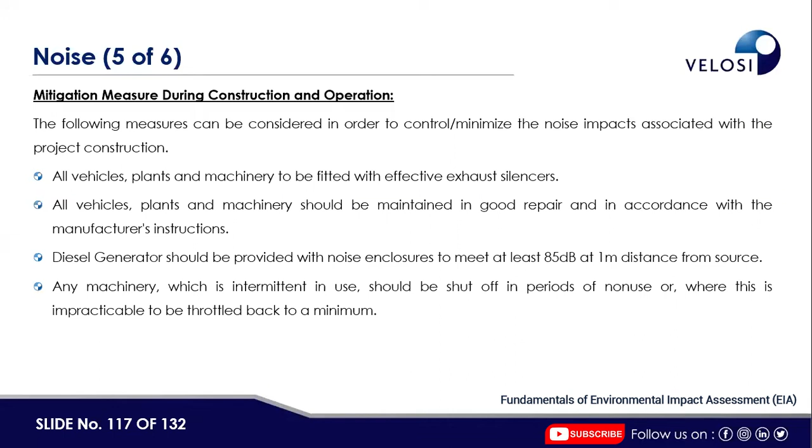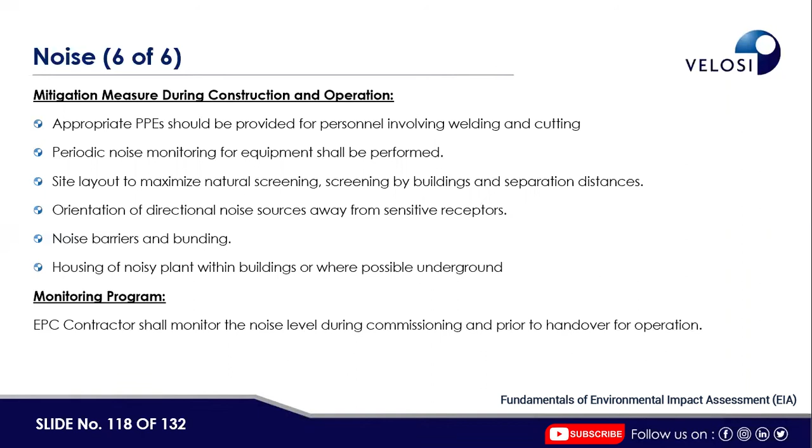Some mitigation measures we proposed include: PPEs must be provided, periodic noise monitoring shall be carried out, and the site layout should maximize natural screening. Then we propose a monitoring program as well, where the EPC contractor shall monitor the noise level during commissioning and prior to handover of the project.

Now we are going to start the traffic section. Basically, in traffic, there are different kinds of studies. But with respect to this environmental impact assessment study, we only mentioned the near main roads, what infrastructures are available, and what kind of infrastructures are available in this particular project.

Although this project is also within the existing facility, we do not anticipate any increase in traffic due to the project facility. But we still propose some mitigation measures.

We do not require any additional road network for this proposed project because it is already an existing project, and the existing road is enough to execute this project.

The peak traffic time considered unavoidable will be immediately prior to work shift commencement. Material deliveries, waste collection, and product collection should be scheduled outside these periods. We have to consider the peak time to avoid traffic congestion, so we should monitor and schedule delivery of materials, waste collection, and product collection accordingly.

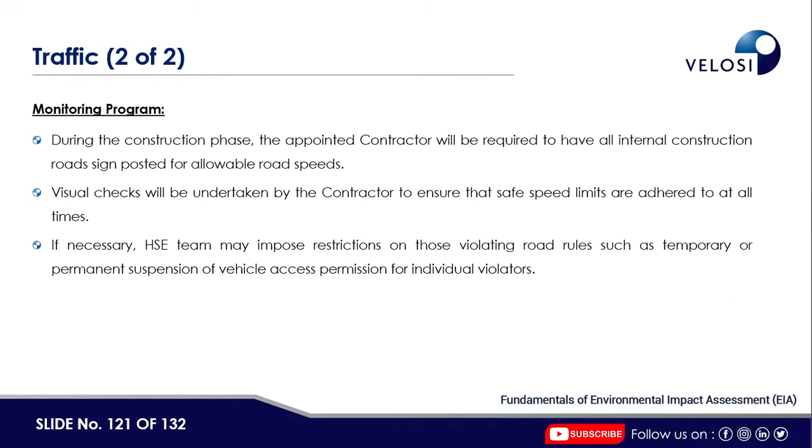With respect to the socio-economic environment, as mentioned before, this project is already in an existing facility, so there is no significant environmental impact on the socio-economic side. Although there is a positive impact with respect to socio-economics, because of this project there is an increase in GDP ratio and an increase in job opportunities, so there is a positive impact due to this project on the socio-economic conditions.

We also propose some environmental action plans. In the construction stage, air quality shall be monitored on a weekly basis, with responsibility also fixed. Noise level at several locations within the work site should be monitored bi-weekly. Hydro test pre-commissioning. Liquid effluent quantity of sewage produced from the work site must be monitored on a daily basis, and resource consumption on a daily basis.

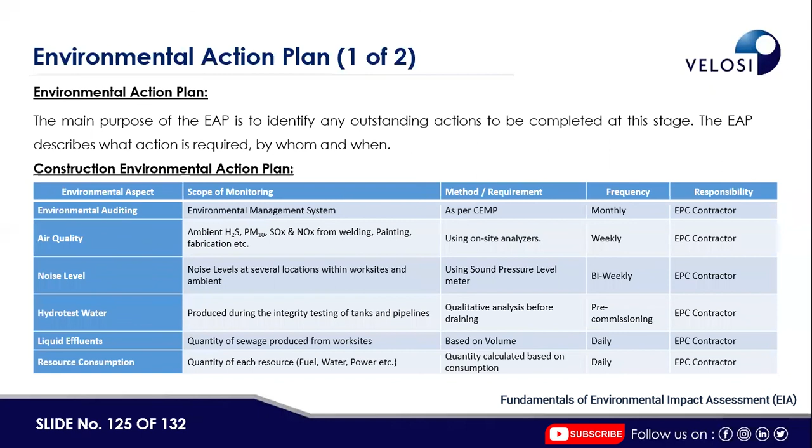As mentioned before about project alternatives, we have to consider some alternatives with respect to site location and with respect to best available technology. So we also carried out a project alternatives analysis for this particular project.

In the no-development option, the project would not be implemented, and in such a case both the positive and negative impacts of project implementation do not occur. If we consider alternate site selection, the project site has been proven suitable, because relocation cannot be possible since it is already in the existing facility. So no relocation option was considered, and no site alternatives were considered.

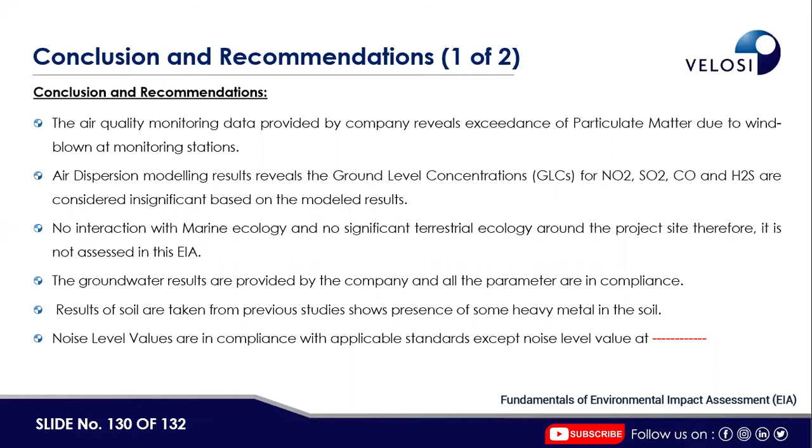On the basis of the conclusions and these studies, we put forward some recommendations. For example, noise assessment shall be carried out for the equipment and machinery. Air quality monitoring shall be carried out during construction and operation. Identification of the inventory of fugitive emissions, and an LDAR program shall be implemented.

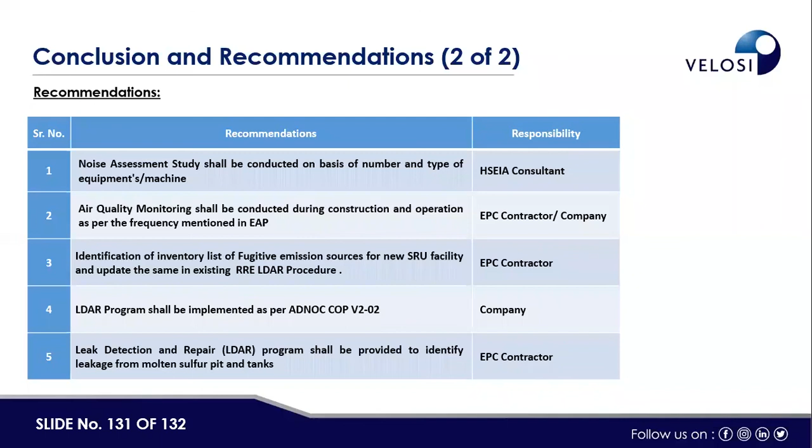This LDAR program was already explained. The leak detection and repair program shall be provided to identify leakages from molten sulfur. So these are the recommendations and conclusions on the basis of the impact identification and evaluation. That is all about our presentation.